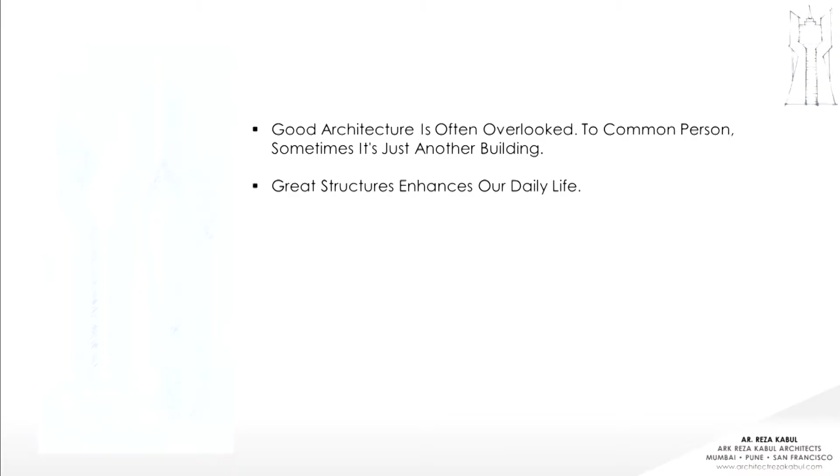It was a competition which we did, and we were the last two selected, and on the fee structure, they didn't give us the project. But I love this project, that's why I thought I should feature it. It's in Gift City, in Gandhinagar, and this is an LIC building. So we thought of coming up with something different, something new. Instead of just doing a simple building, we looked at the logo of LIC, and we went ahead and designed the building.

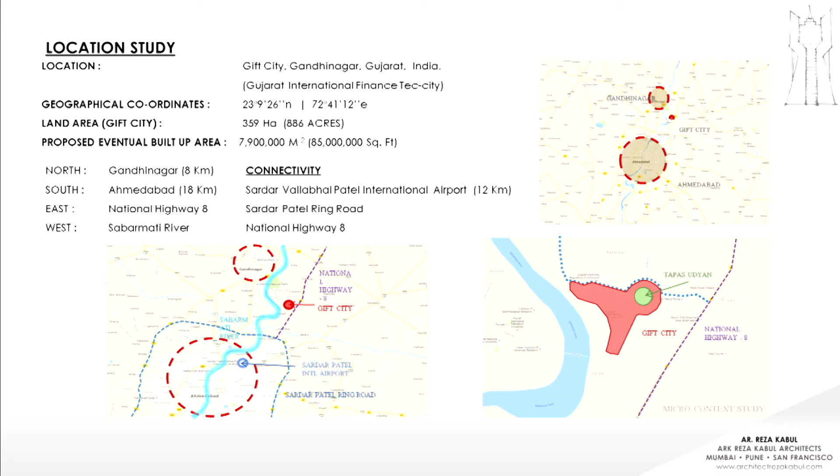So that's something about the Gift City, Gandhinagar, and the location map. Do I point here or here? Oh, sorry. So that is,

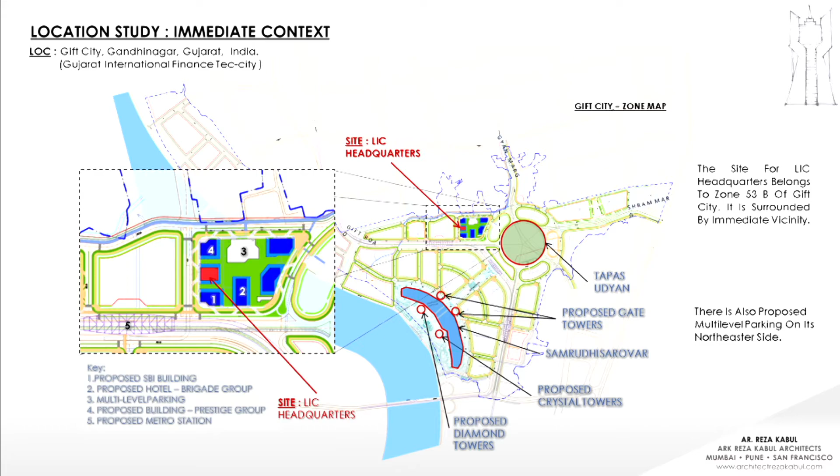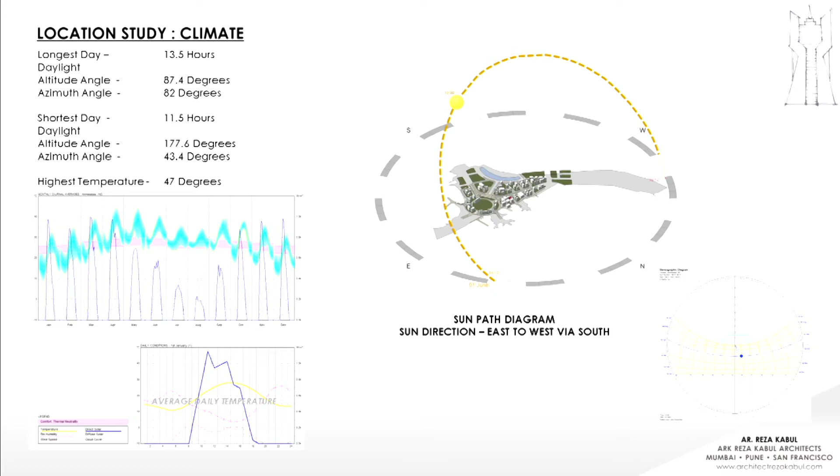That's the whole Gift City plan. We were given a site out here. In Gift City, they've taken care of all the services. It's all below the ground. And the parking is a mass parking area. You do not have to provide parking in the building itself. It's just 10% of the requirement. So we looked at the site and all the buildings around it. We did some climate studies, the sun path, and the solar analysis on the site at various times of the day and different times of the year.

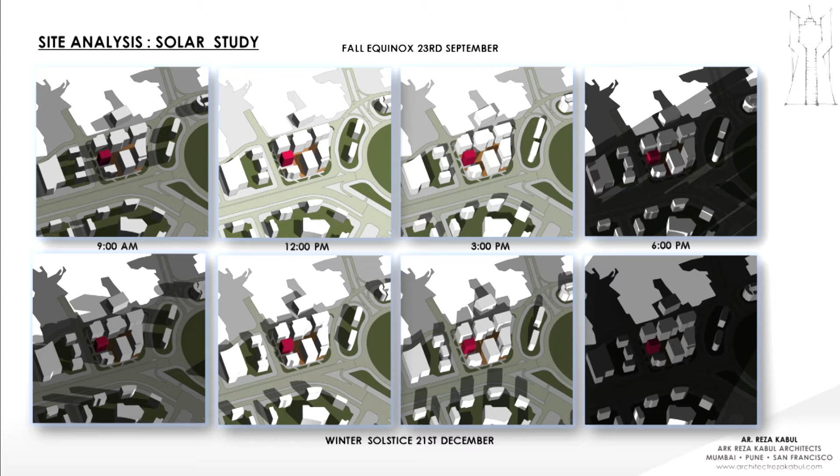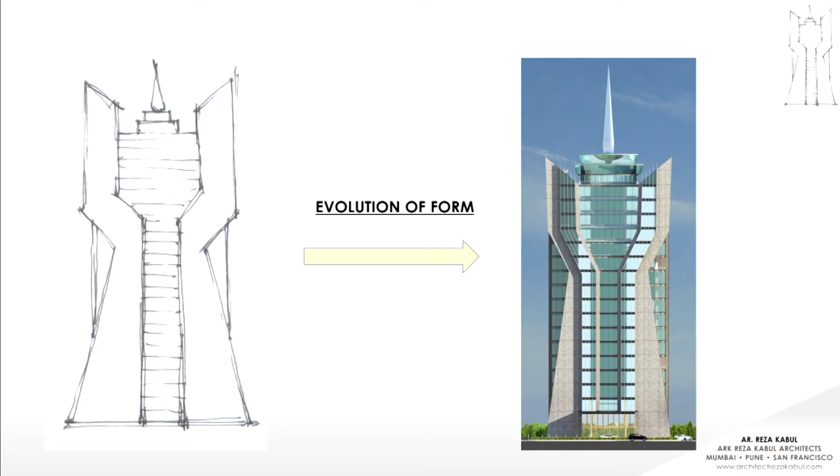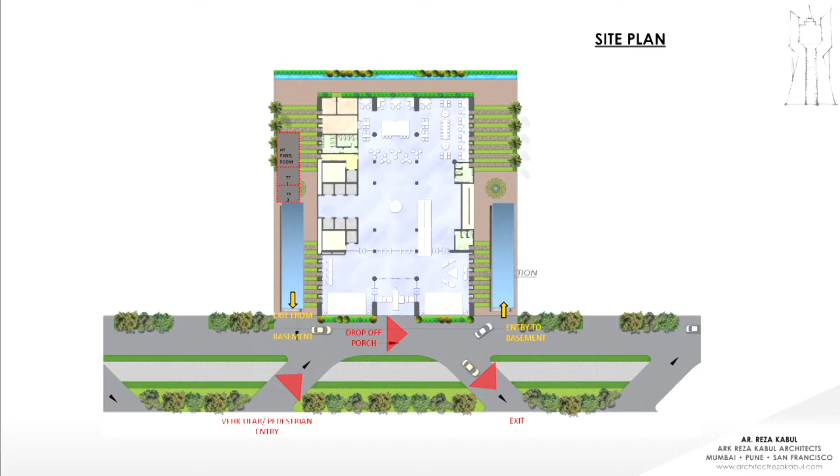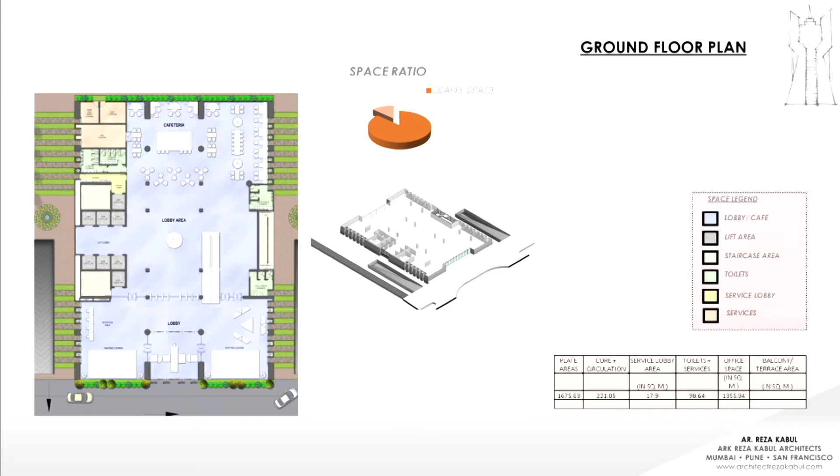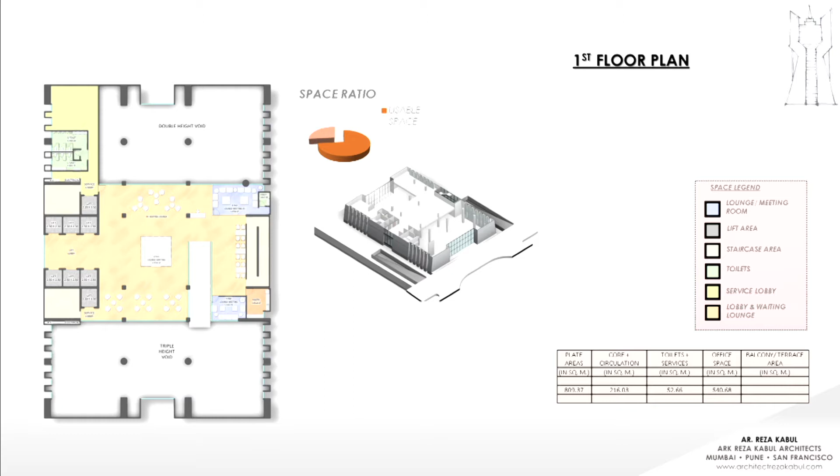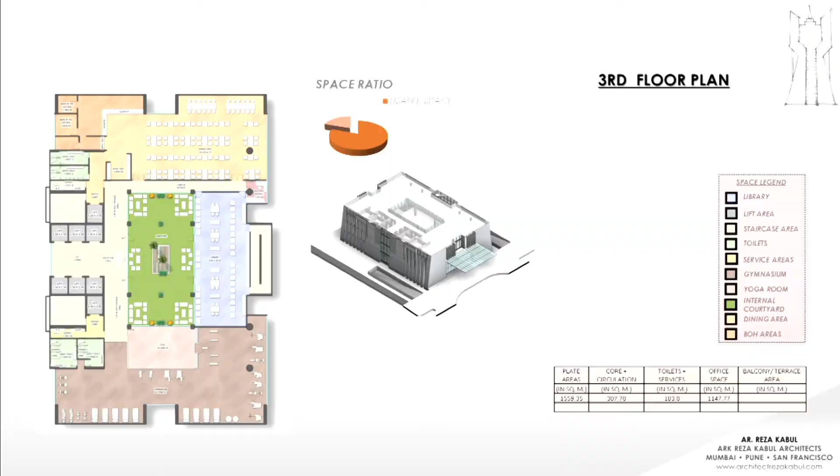That's the second floor plan where you still have the double height area. From the third floor onwards, we start with an atrium. The idea was maximum light penetration into the office spaces, and that's how we have windows all around. And then we have connectivity on various floors from the atrium. These are all your general floors. From here onwards, we start with the auditoriums, the executive floors.

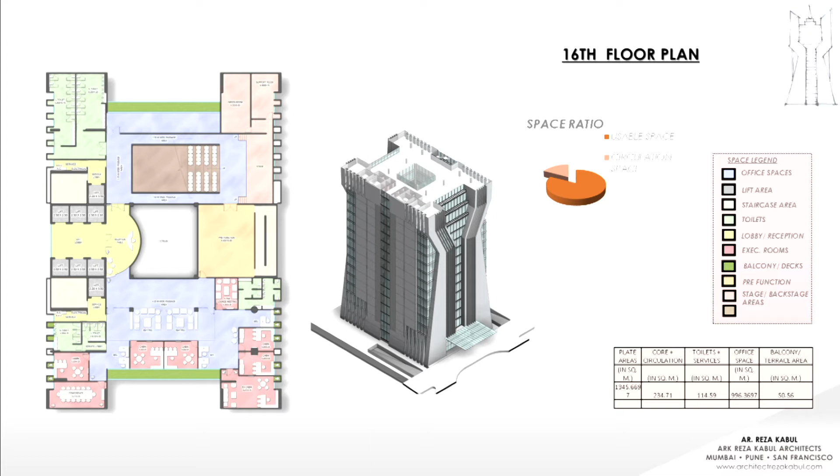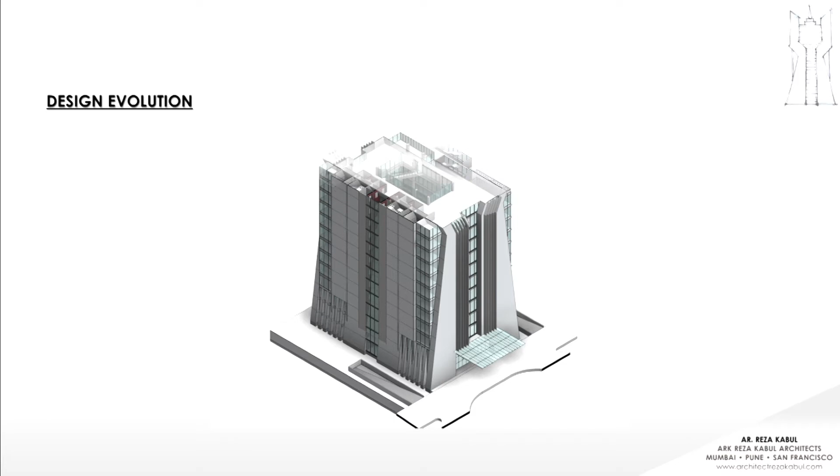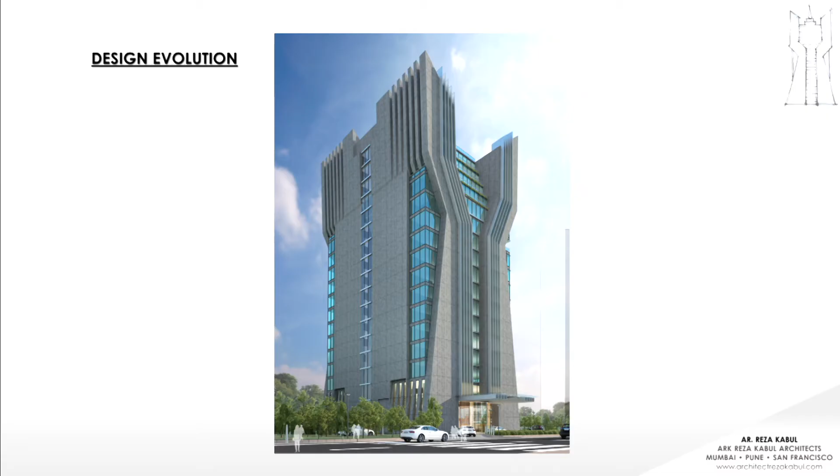That's how the whole structure builds up. That's the entire building. And that's the section. We have the entrance lobby, which is triple height, the executive lounge, the common lounge, the workspaces, and then a landscape area, and the floors vertically with an atrium in the center.

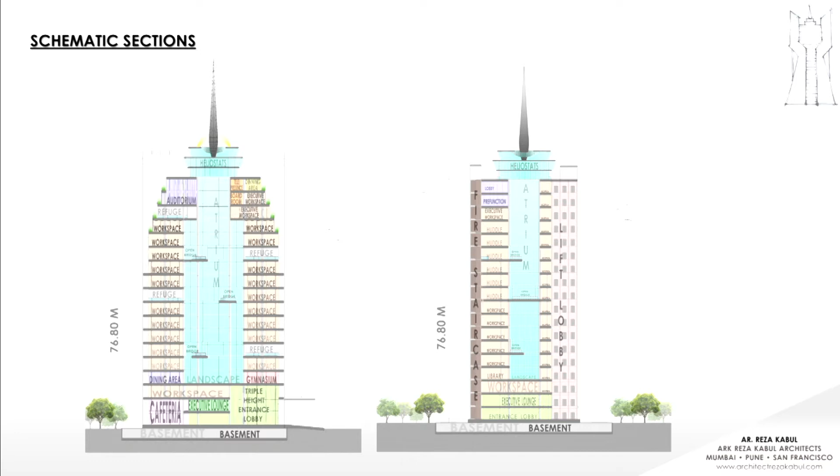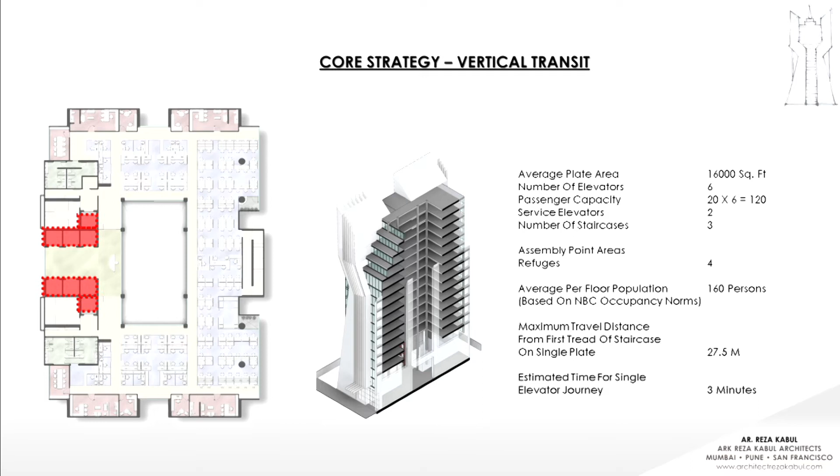So when we did this building, we thought of a lot of the sustainable aspects. We did the core and all the vertical transportation. We worked out the traffic analysis for the people. We did the disaster management as well. So if there's an emergency, a fire, earthquake, anything, what is the time taken for the evacuation?

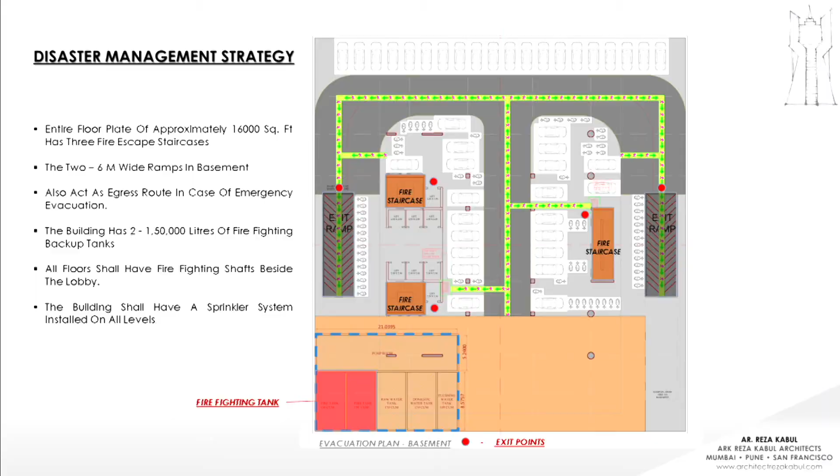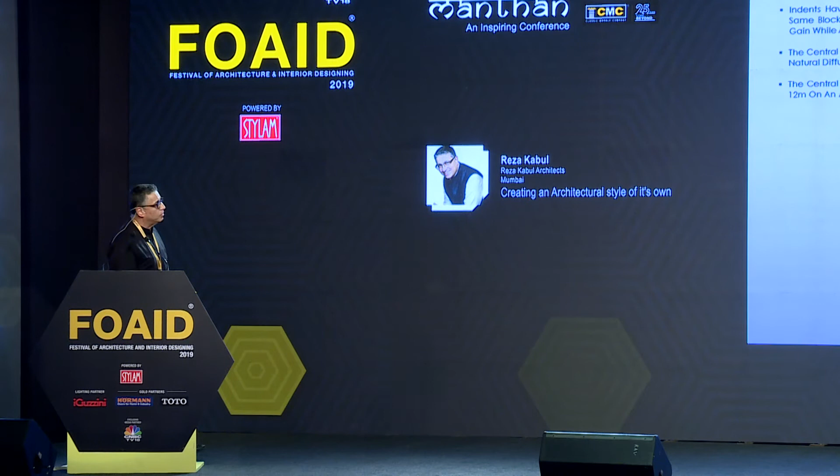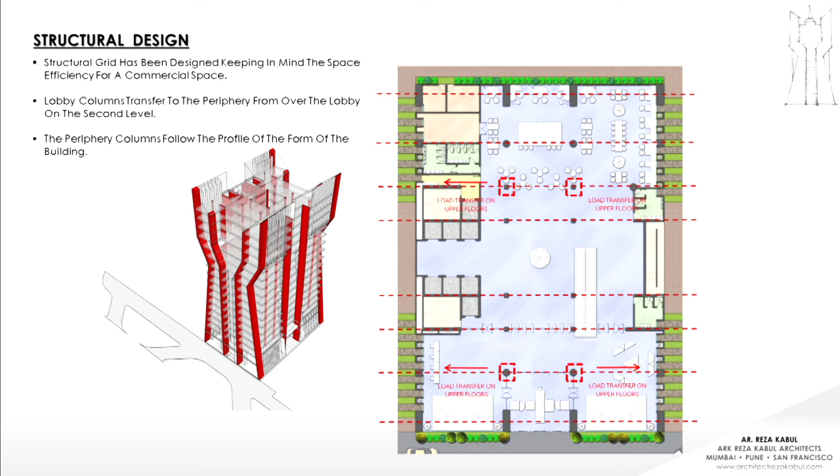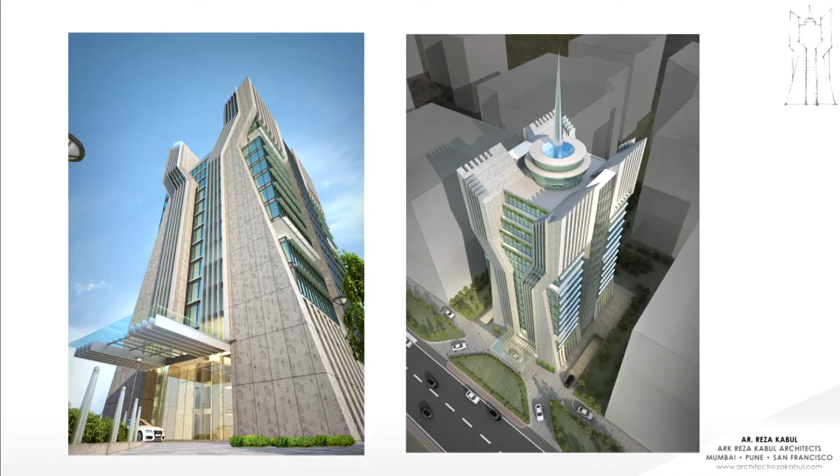That's various views of the structure. That's a shot from the atrium on the top. This is the one? Okay.

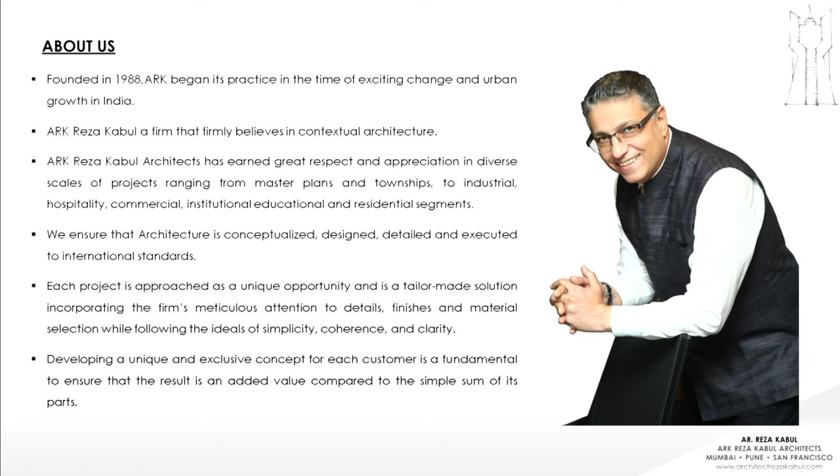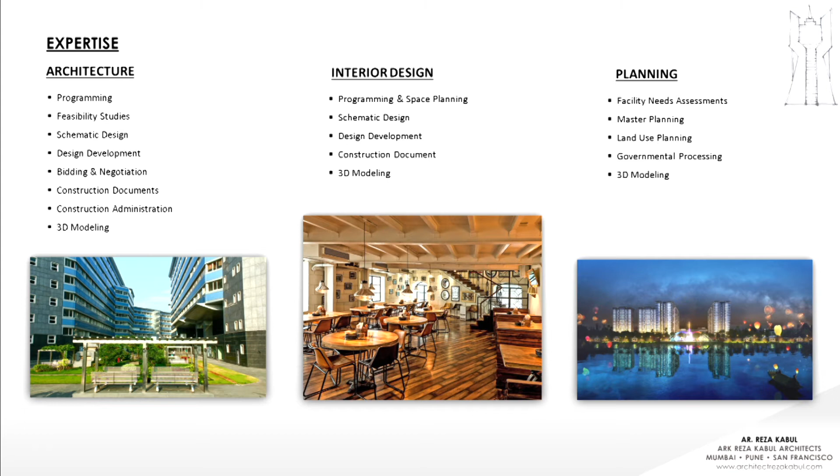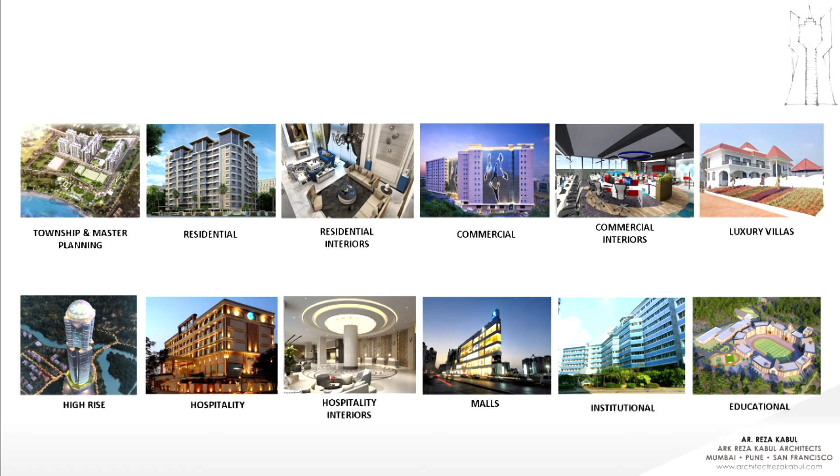Something about us: we started in 1988. It's been 30 plus years we've been practicing. We are a global firm with offices in Mumbai, Pune, and San Francisco. We do architecture, interior, and master planning. These are some of our prestigious projects that we've executed. So, if you could just have the AV.

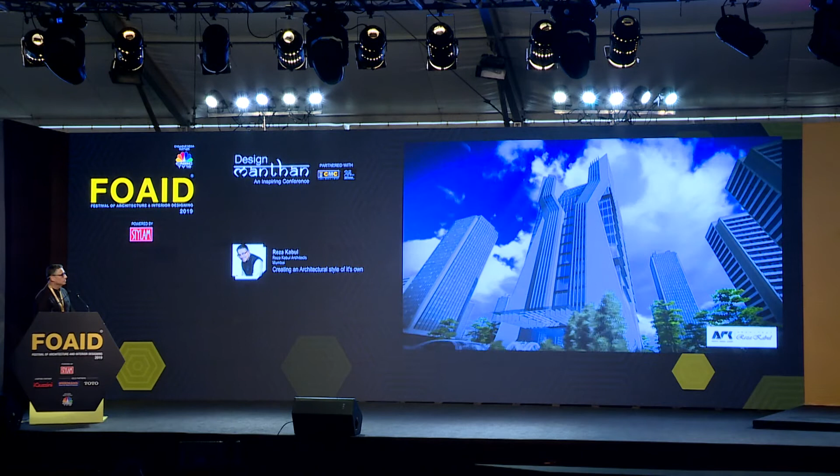So if you see, we have sun breakers on the side where the sun comes in, and we've tried to cut off the sun maximum so the load is not too much for the air conditioning. That's the triple height lobby that we have.

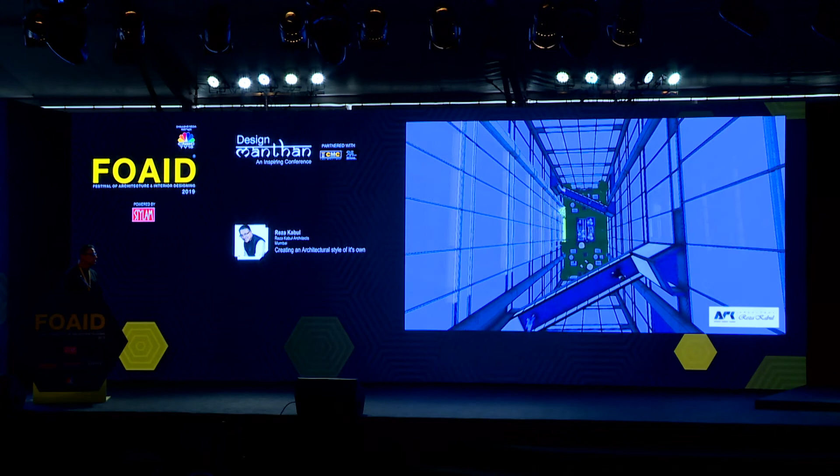So this is only a part of the presentation that we actually did for the competition. So you can imagine the amount of work that goes in to do a tower and to do a competition.